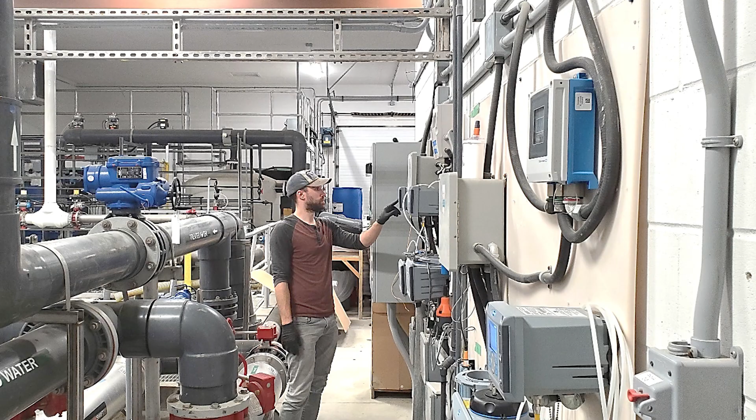The water problem began with the detection of diesel fuel in the clean water holding tank, preventing the safe delivery of water to homes. Several cleaning attempts were made, but the issue looks to be bigger than we thought. There is no simple and easy fix for the pumping station.

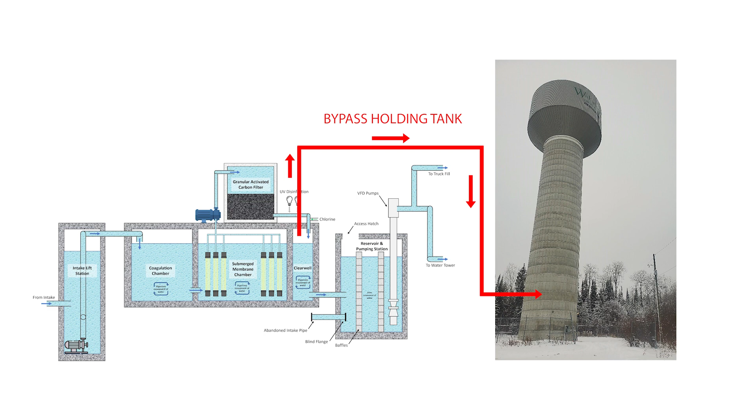Our new plan is to create a temporary bypass to allow water to go straight from the water treatment plant to the water tower. This is the safest and fastest option at this time. We are working on a long-term plan to fix or replace the pumping station in the spring. We are also working with very reputable and experienced contractors to complete the work.

Here is a timeline of how this crisis unfolded. December 21st: a pipe burst late in the night at the pumping station, causing a loss of water pressure and draining of the water tower. The pumping station had flooded due to a burst pipe, causing the pumps to stop working. A jerry can was found in the building, and there was the smell of diesel fuel in the air. Broken pumps kept any contamination from spreading throughout the community.

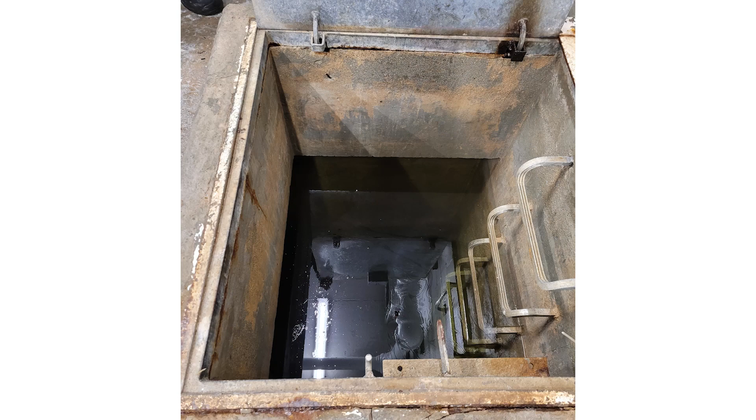December 22nd: community leadership and the Spills Action Center were notified about the potential contamination. Samples were taken by KCA to see if diesel had entered the water supply. There was a noticeably oily layer on top of the water in the holding tank. The community ran out of water at around noon on December 22nd. An emergency committee attempted to contact the Ministry of Environment to ask how to safely get rid of the contaminated water. We also contacted contractors to repair the pumps and clean the holding tank after removing the water.

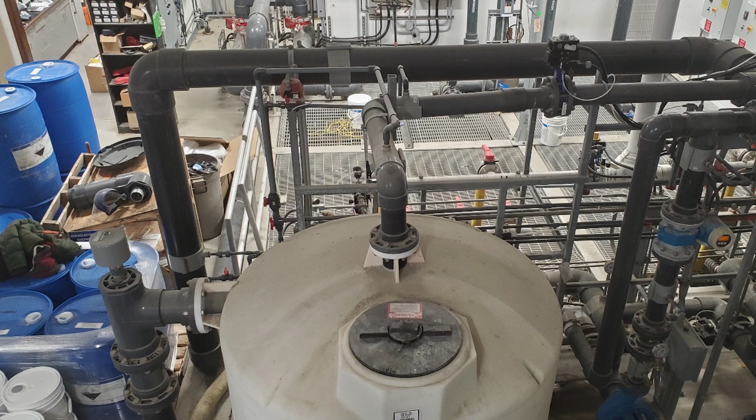On December 23rd, evacuation efforts began. A plan was created to have a professional contractor clean the holding tank, but we had to wait for advice from the Ministry of Environment on how to get rid of the contaminated water safely. Naturally, services were difficult to access over the holidays.

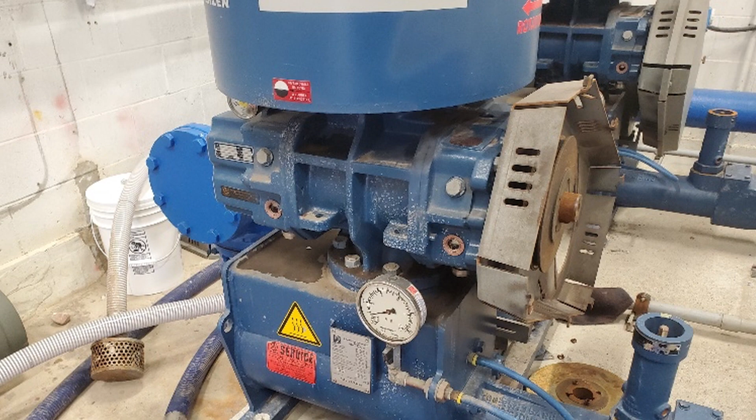December 26th: we were advised that contaminated water could be pumped outside as long as it was passed through a filter designed to remove fuels. A filter system was sourced from Red Lake, but delayed due to poor weather. December 28th: a filter system arrived and was prepared. 2 to 3 days were needed to pump out the water through the filter. The holding tank would be cleaned after it was emptied, which should take another day or two.

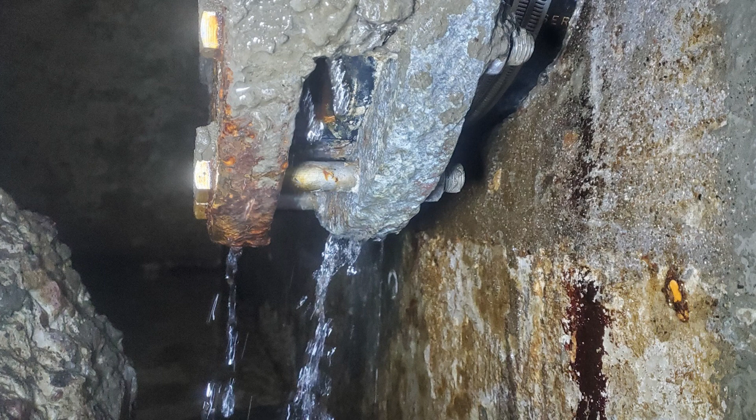January 2nd: there were delays with cleaning the holding tank due to a leak from an old capped-off pipe in the holding tank. This was a previously known leak, which caused the boil water advisory to be issued earlier in July 2022. January 4th: the leak cannot be fully repaired, but it was sealed enough to continue cleaning.

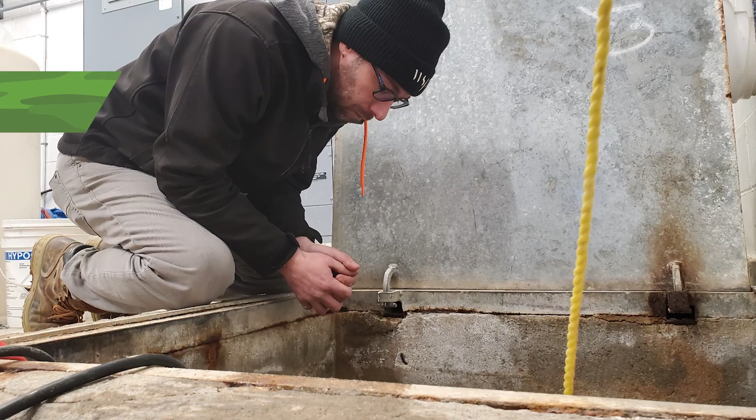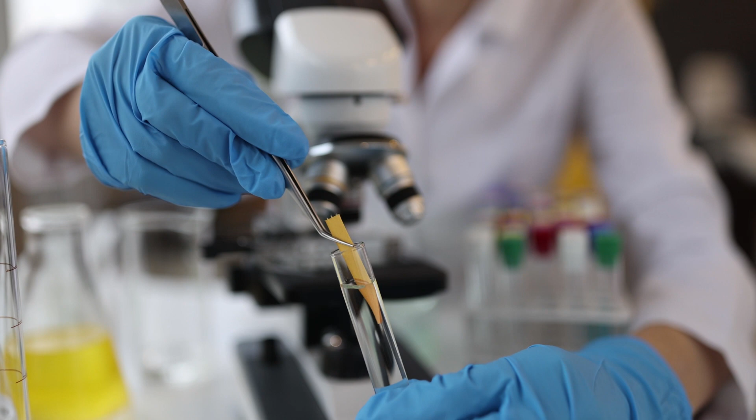January 5th: the cleaning is complete and the holding tank refilled. Samples were taken to ensure safety and rushed to the lab. Results would take between 1 and 3 days depending on shipment speed.

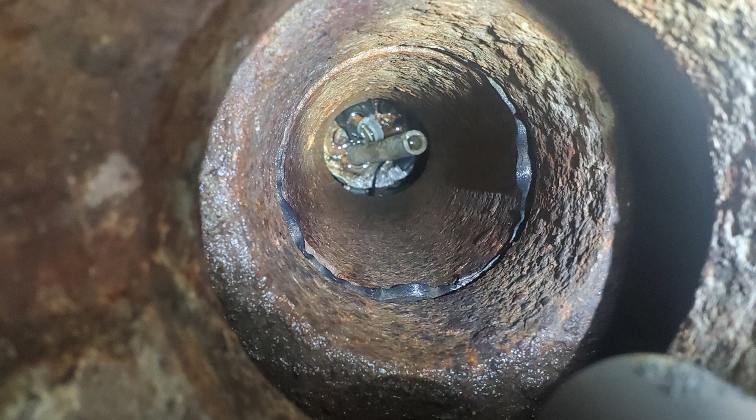January 7th: tests showed that there was still diesel in the holding tank after cleaning. A decision was made to involve an environmental engineer, WSP, to assess the situation and investigate other possible sources of contamination. January 9th: a work plan was developed to try cleaning the holding tank again with careful supervision. We will investigate other areas such as the river, the raw water intake station, water treatment plant, and around the pumping station to make sure there are no other sources of fuel in the water.

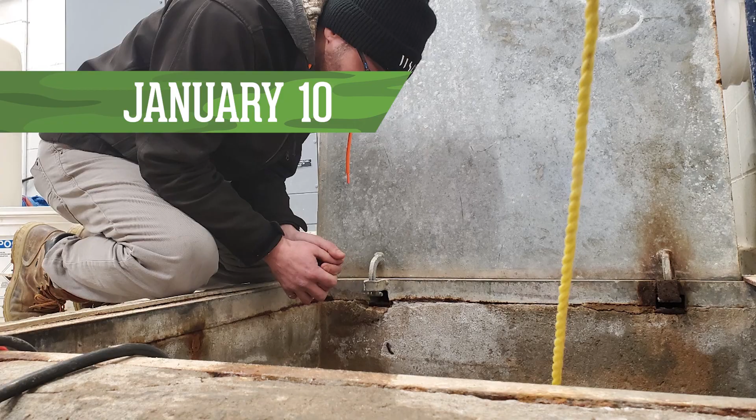January 10th: we started a new cleaning cycle with emptying the tank. A cleaning cycle should take around 7 to 9 days, and sampling will be done again afterwards. There were some unexpected results. Fuel was not found in the interior walls of the pumping station, which means that the path for the fuel to get into the holding tank may be different than previously expected.

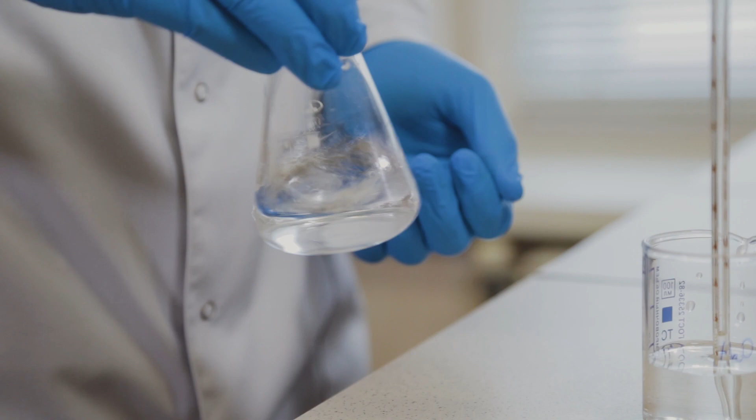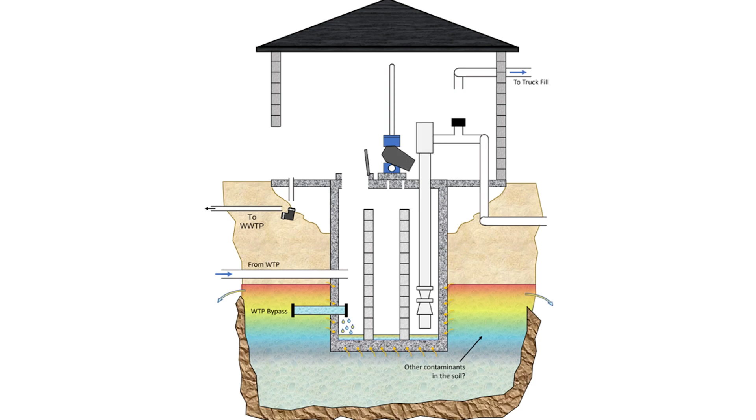January 16th: cleaning was completed and the samples taken for analysis. January 20th: we got lab results showing that there was still fuel in the holding tank exceeding health limits. The amount of fuel in these samples was comparable to the first cleaning, meaning that the cleaning procedure was not the problem.

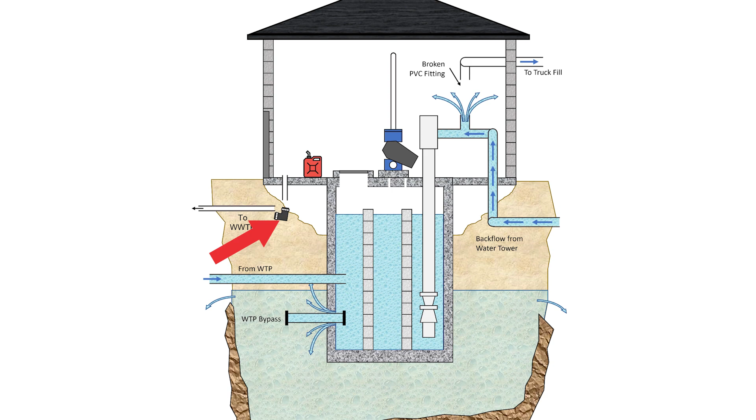We think that the fuel entered the groundwater beneath the plant through a broken drain line and got into the holding tank through the leaking abandoned pipe. Since the soil is potentially contaminated, there would be no quick fix good enough to be sure that it wouldn't get back into the holding tank again.

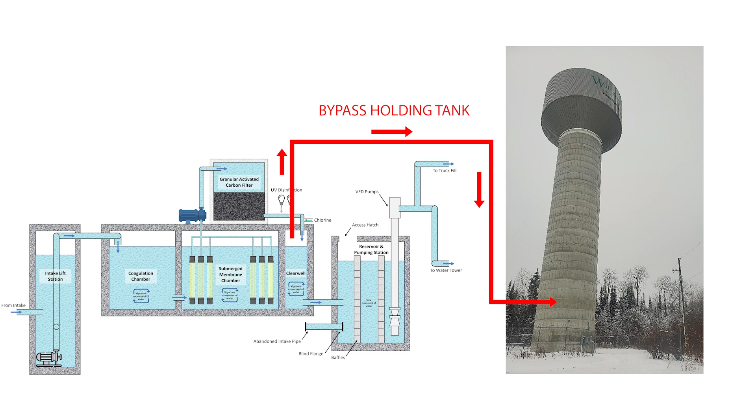We have now started work on a bypass system. However, this requires a high-powered pump, so careful planning and special parts are needed for the installation. We cannot guarantee an end date due to the wait time on parts. We have heard that some items may take up to 3 weeks to arrive. Once parts arrive, it will take about a week to install the bypass and another few days to refill the tower and safely restore water without causing damage to the system. The current estimate is beginning of March for completion.

Thank you for being patient throughout this ordeal. Please be assured that we are working as hard as we can to get this water outage fixed as fast as possible.